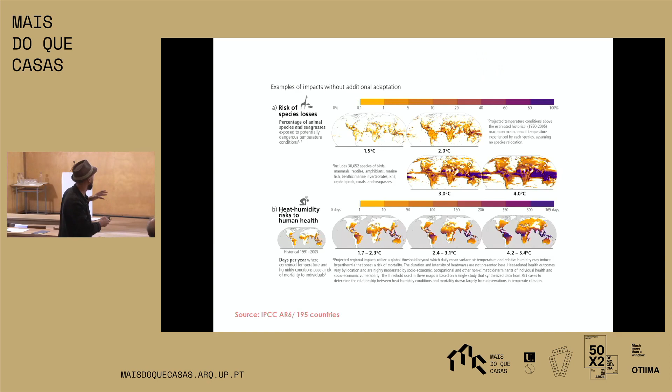It's full of data, like for instance, how it's going to heat the planet, or how the animals are going to die, and all this kind of information that is really useful when you have it out. For instance, they're explaining that this data is extremely important for 2030.

What we are going to do during the next 6-7 years is going to be extremely important to decide if we're going to reach the goals we are supposed to reach for the Paris Agreements. Do you know about the Paris Agreements, I guess? Can you raise your hand if you know about it? Everyone knows, right? So this is the Paris Agreements, and this is where we are right now.

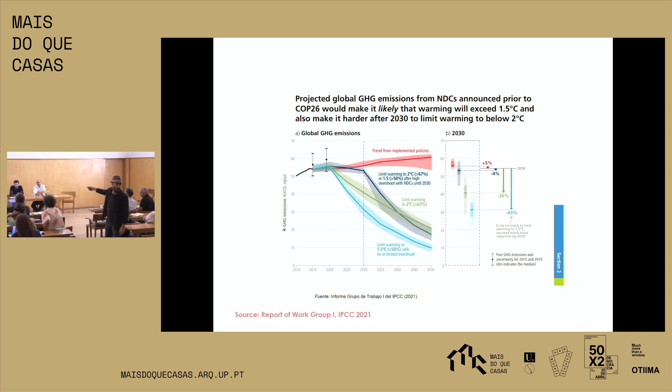So that's why probably now we are in the moment with the most change related to regulatory standards. There are a lot of new regulations. For instance, the European Commission is working on the new directive of the energy performance of buildings. This is going to affect all of us, right? So a lot of new regulations to achieve a goal: 0 emissions by 2050 and minus 40% of emissions by 2030, okay?

But the question is, do we know what 40% emissions means? Do we have a shape for it? Do we understand? I'm going to ask you a question and I need feedback: do you know, during the COVID lockdown, which was the percentage of reduction of carbon dioxide emissions when you were at home? Were you at home in Portugal? Yes? So can anyone help me? Which was the percentage of the reduction of carbon dioxide emissions in the world?

What? No, the percentage. So, which is the percentage of the carbon dioxide reduction emissions? Like 1%, 100%, 2%? Lockdown, 2%? That would be a hell, brother.

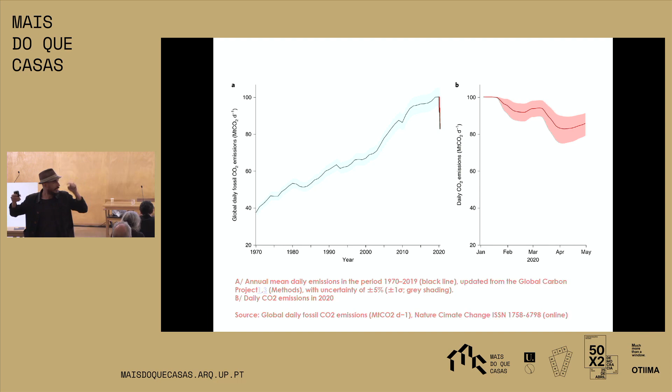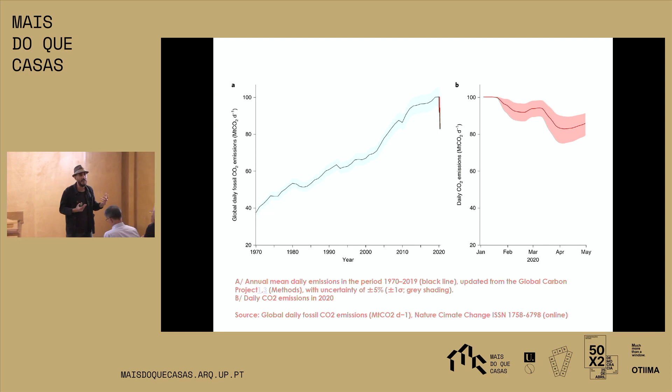Everyone moving around, 40%. So the question is, do you think we can do that without changing the model? Anyone in the room believe we can reach that goal without changing the model? Can you raise your hand, please? No one, right?

So that's why we think we need a new language. Since 1921, it's known that we see and think through language. What does it mean? It means that you cannot see what you don't have a word for. If you cannot express it, it can be in front of your eyes and you don't see it. For instance, we were told during our studies that in the States at the beginning, the Aborigines were not able to see a train because they didn't have the concept, they didn't have the word. So what they were watching was a dragon of fire, okay?

This is the same for everything else. You can pass every day in front of something, like a building or whatever, but if you don't know it, it's probable that you don't see it, right?

So, the proposal that we want to bring you all this afternoon is this: during the modern movement, it was the expression of fossil fuel materials, right? So the advantage of fossil fuel materials is that everything can be done. We have no limits. We've been told it's only about money, right?

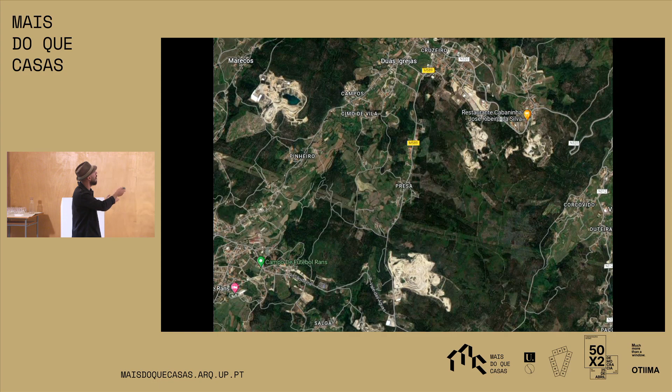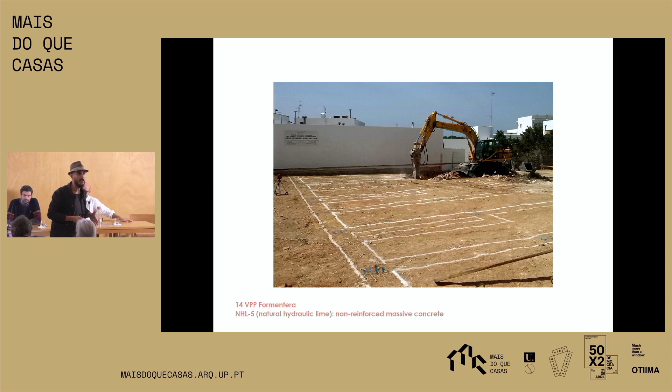Let's start with lime because it's very useful to explain the way of designing. Lime concrete is the concrete used by the Romans 2,500 years ago. In reality it's very fragile compared to modern Portland cement, not very hard. So you cannot design with columns or pillars, you have to design with load-bearing walls, so the weight of the building is spread along the foundation. The resistance of lime concrete is only 5 megapascals, 20% of regular concrete, and it requires 300 or even 700 days to get strong enough.

What's the interest of this concrete? It's not happening yet, but it can be cooked at 900 degrees. This is a difference, because modern materials are usually cooked at 1,500 degrees, and we cannot reach that temperature with clean energies. So 900 degrees is a temperature we know we'll be able to reach with clean energies, and that makes a difference, right?

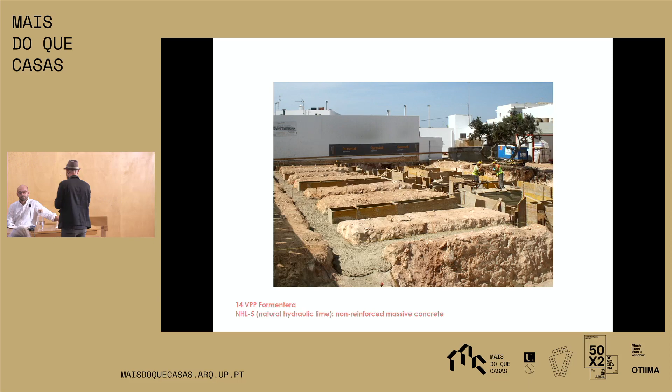So in order to make these materials viable, it's very useful to have the walls at 3 meters of distance, because this is the kind of weight these natural fragile materials are ready to load. Does it make sense? This is the first building we designed that way, and you can see all the doors are reused.

In this building, besides changing all the materials coming into it, we tried to know the name and surname of every person working to produce the materials, to know their labor conditions. We tried to include all the different ways to approach low carbon impact materials, natural materials or reused materials like the doors. Here we reused 100 doors.

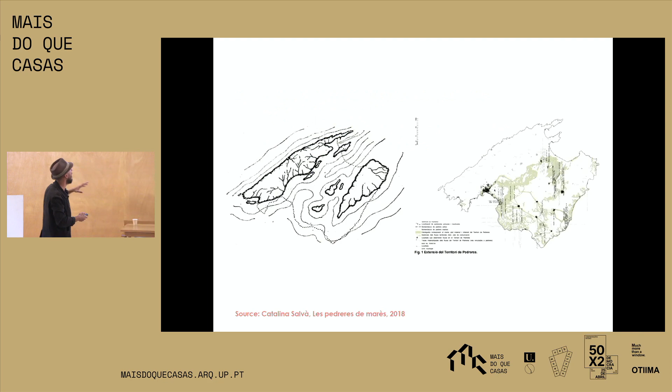So, second material in Mallorca: sandstone. The sandstone receives these kinds of questions: aren't you using too much stone? Won't it run out? What about the impact on the landscape if everyone uses sandstone? This is the question when you're doing only 1 or 2 projects in sandstone, which are like 0.1% of the buildings in Mallorca. Everyone thinks you're going to run out of sandstone, when in reality the sandstone is in areas that were underwater 200,000 years ago.

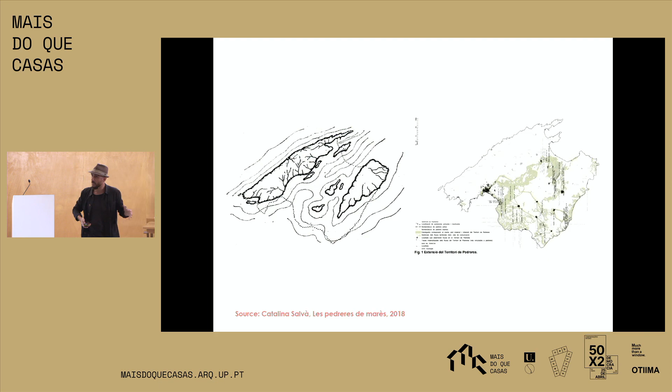So 20% of the surface of Mallorca is covered with sandstone, so that's not going to be the problem. The problem is that 12 years ago we had 20 quarries, and in 12 years, 12 quarries have closed because of the retirement of the old people working in the quarries. Young people don't want to work in the quarries, and that's a way to get the extinction of the material.

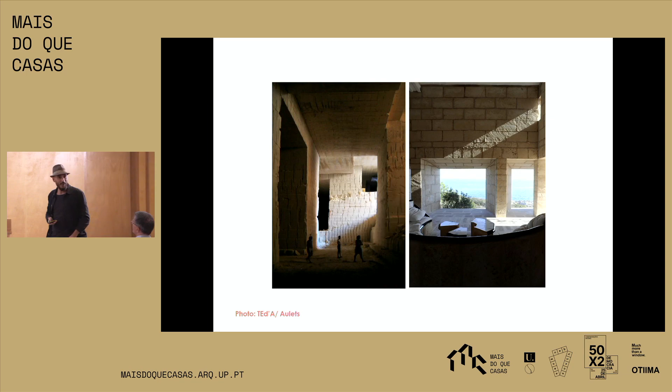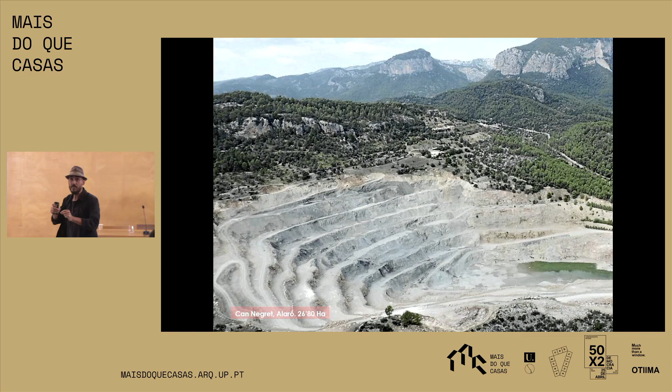But this kind of stone has been used for vernacular institutional buildings for hundreds of years. And the quarry itself is actually very nice, it even has some architectural qualities, let's say. You can even reach the same beam of light from Can Lis by Jørn Utzon, you can follow it in the quarry, right? There's something about this quarry that's not like gravel quarries. So maybe the quarry has an impact, yes, but not as high as a gravel quarry. So when we're talking about natural materials, maybe it's not 100% better, but it's a degree better than the previous ones, okay?

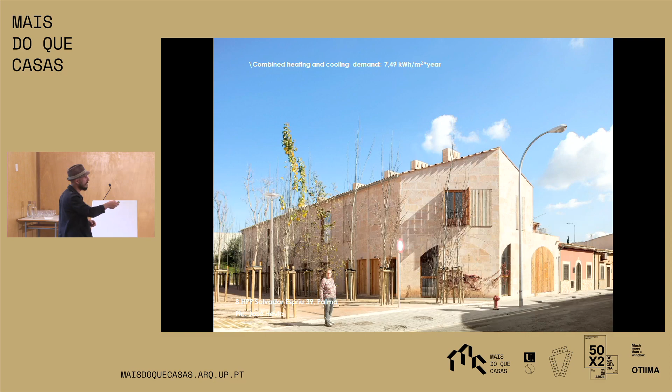So this is, for instance, the quarry Can Negret, where we got the stone to do this building that we designed in-house in Palma. It's a building of 2 stories, row houses, like the kind of typology that Peter Barber explained this morning.

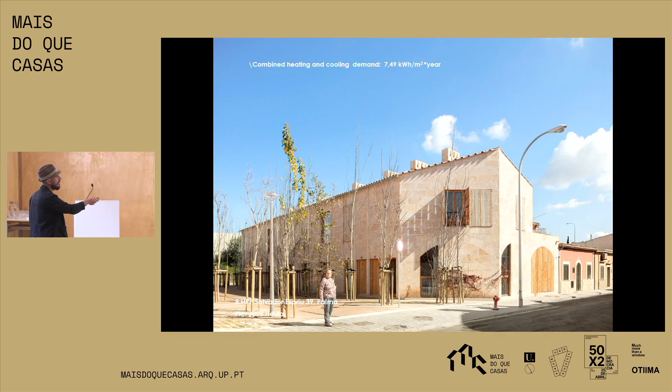You enter the house here or go upstairs to the first floor. On the ground floor there are stone vaults designed to provide mass, which is a lot of weight, to provide free cooling in summer. On the first floor we designed a pitch roof because it's cheaper in terms of structural calculation, since a pitch roof requires less wood than a flat roof. With the extra money we save from the pitch roof, we can pay for the vaults, because this is social housing and we have to fit very low budgets.

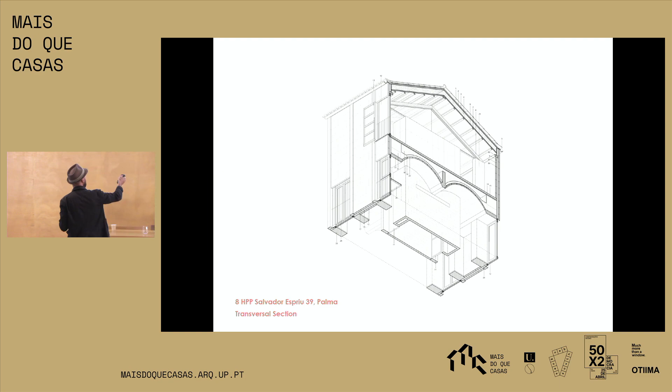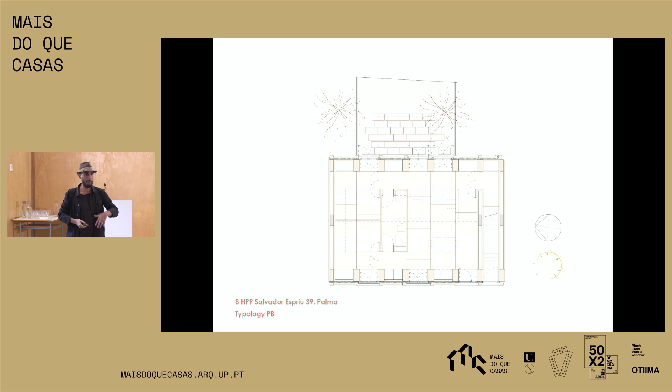Of course, the plan is related to the construction and these materials. It's impossible to think of a plan in regular terms and then try to use these kinds of materials. First you have to think how to bear the weight of the vaults and the horizontal forces from them. So you end up with huge columns in the facade, and these huge columns have to become part of the plan, becoming places to stay, storage, and things like that.

And this is the first floor under the pitch roof. That's a kitchen, another kitchen, and a patio.

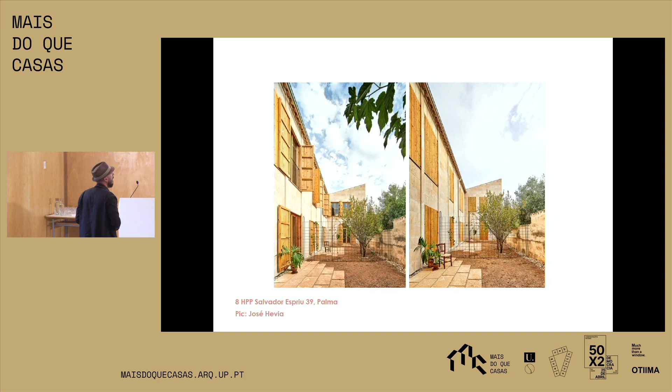We use Posidonia insulation from Mallorca beaches. This is a natural-based solution that is very interesting because it provides visibility about this plant that, when tourists come to the island, they think it's waste, but it's not. It's necessary to keep the waters of the island clear. So the reason, if any of you have ever gone to the Balearic Islands to swim, is because of this plant—otherwise we would have very dirty waters.

So this plant can be dried under the sun and used as insulation in the roof, and then you just cover it with regular tiles.

And this is how it looks—the building is not isolated. It's part of a plan with two different buildings and a public space in the middle, designed to avoid the heat island effect. So the pavements are draining, and the trees have been designed to provide shade to the building, participating in the bioclimatic design of every building.

So in the end, this structure is the result of having a very long depth. Since the typology is very long, nearly 14 meters, you need a lot of windows, and to have a lot of windows you have to open the facade very much. This is why you have all these columns, in order to have as many windows as possible. And this is the community space that has been created below these columns.

Question number 3: you make everything the same—aren't you tired of copying yourselves? From Palma.

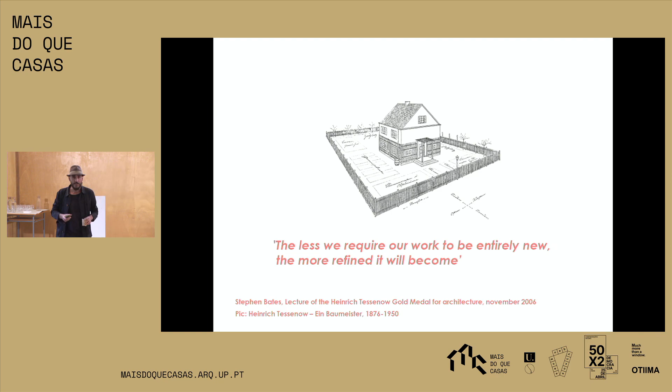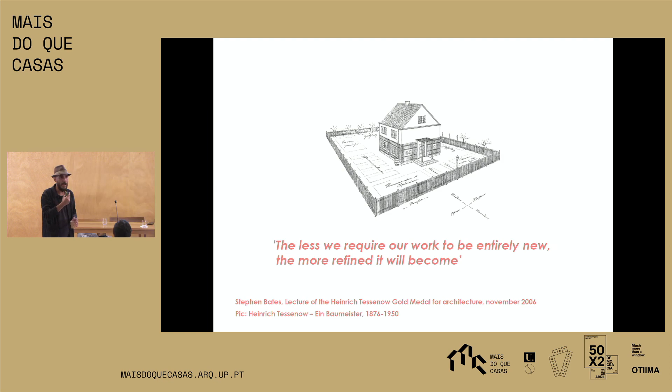I don't know about you, but we come from a context where it seems every project has to be different, new. The reality is we prefer to believe, like Deleuze, that deep repetition is characterized by deep difference. As Stephen Bates said, the less we require work to be entirely new, the more refined it becomes. That's why now we are in a process of trying to get better with every project—it's like you design a single project in your life, and you try to make it better every time.

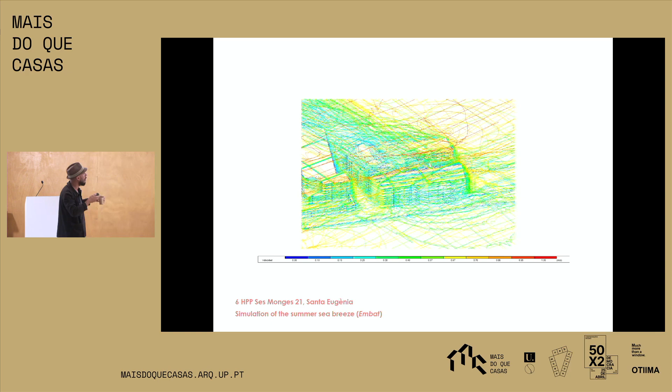This is why I'm going to explain this project in Santa Eugenia, which is like version 2.0 of the previous building in Palma. It's related to this very small town, and has a trombe wall facing south to provide hot air in winter, and a very clean structure where all the windows are the same, straight one up to the other. Of course we simulate the winds and breezes, because cross-ventilation is very important in our climate.

We try to reuse everything that existed on the site. There was a small workshop there, and we reused all the stone, the shades, and the tiles, as you can see—this is the stone from the previous building and the tiles. And this is the patio leading to the dwellings, with some private gardens for every tenant.

This is the evolution of the project. In the first project, since the depth of the site was very small, only 8 meters, we used a concrete beam. So yes, we're using concrete, and we use it when we need it. We use it as a very precious thing, trying to use as little concrete as possible because it has a lot of value. So we use it only when we really need it.

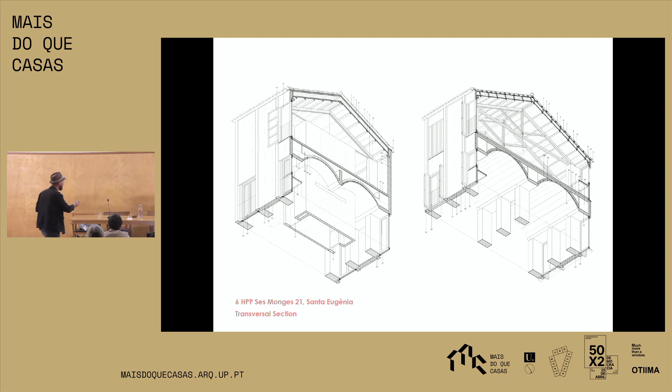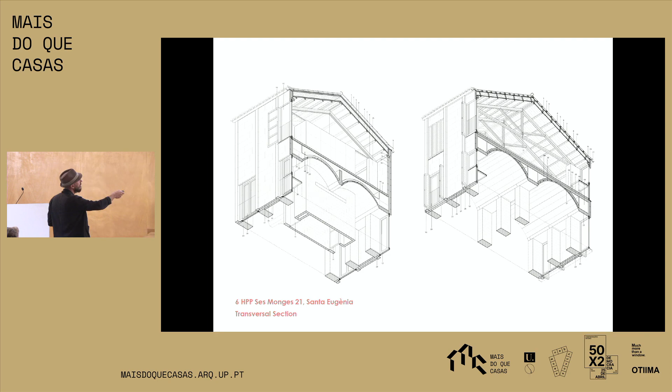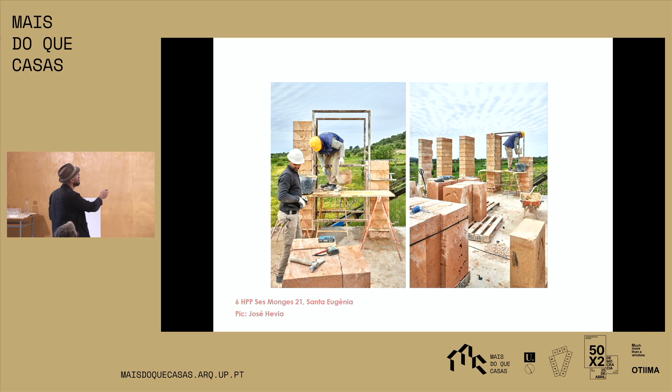In the other project, since the depth of the plot is 10 meters, we had space to introduce a third line of columns that provides a double vault space, more flexible in terms of use. This is the plan where all the columns are the same, which is very important because it's much easier for the builder to build fast.

That's the most interesting learning from this project: we were trying to build faster, cheaper, easier, and more refined. That's very important when building with natural materials, because natural materials are of course more expensive than conventional ones.

This is how we're building the vaults, and these are the kinds of spaces that come from it. This is what we believe is an architecture of degrowth. We don't have to be afraid of this word, because we believe we can provide a degrowth in the consumption of resources, but a growth in comfort.

Every dwelling has two places for the living room and kitchen, and then you have the bedrooms behind with panels that you can remove to change the plan through the years, and I think that's very important. We're providing a building designed to last hundreds of years, or as much as possible, but it has to be very flexible. So if you change the program, you can use it differently without doing so much work.

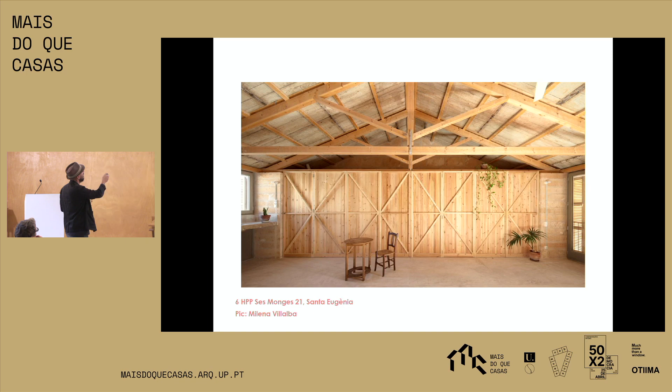What's very funny is that at the end you are building in the same way the Romans were building, with stones, lime mortar, and a stone lintel. That's the first floor, where all the wood is reused or recycled, except the wood trusses. These wood trusses, since they're structural, we use new ones, but everything else, like the ceiling, is reused wood.

And of course, it's insulated with Posidonia oceanica. We are trying to calculate the comfort for 2050 in order to provide comfort facing these kinds of new extreme heat waves that are coming.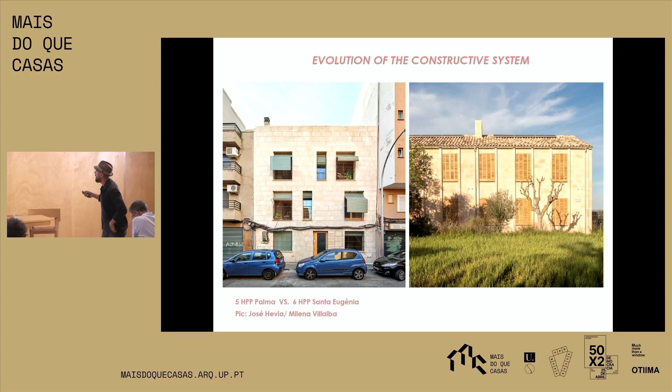What's interesting from the learning process is that we went from this very first building designed in stone to this last building, trying to make it as precise as possible. We learned that when building with this kind of material, it's much better being very ordered to fit the budget than, for instance, moving the windows. That may seem silly, but moving the windows costs a lot of work for the workers—it's much more complicated. You have to be there controlling every detail, and it really becomes much more expensive.

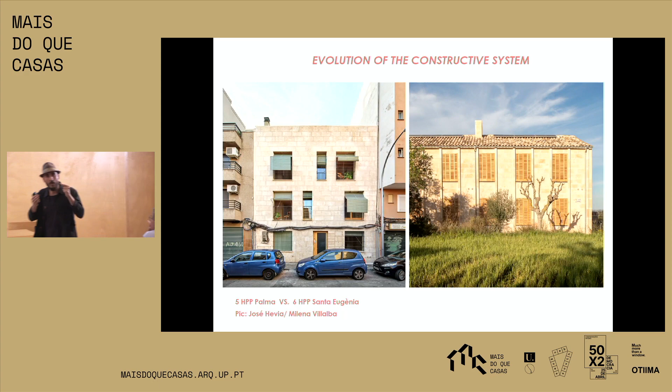What we also discovered is that when you're building like that, you require a lot of screws connecting the outside layer with the inside layer. And every time you cross the insulation, you may have a problem with endurance through time.

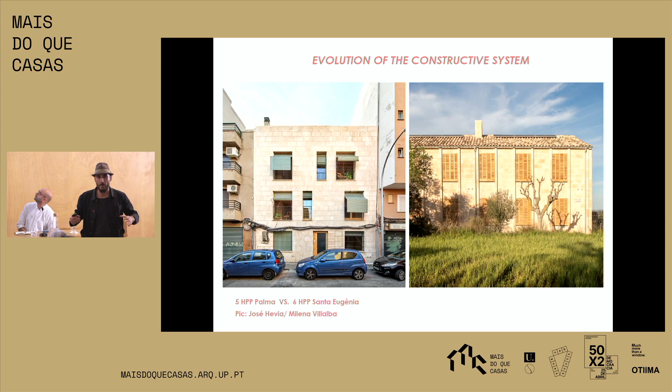That's why we developed this system of pilasters, so the external layer is more or less self-load bearing, and we are using connections only at the height of the lintel. It's much easier for us as architects to control.

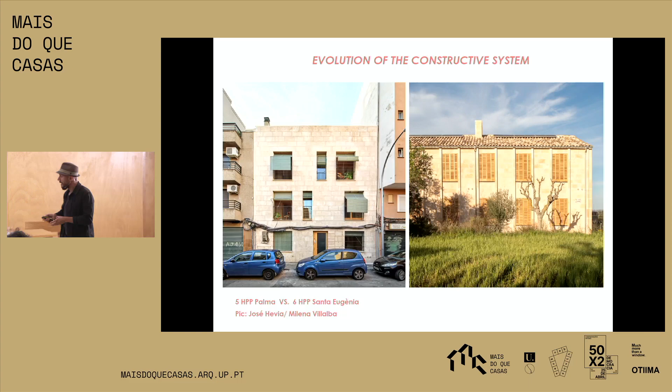So as an architect, you can go one day to the worksite and with a single visit control all the execution of every connection in the plan. Does that make sense? But instead, in this other building, it's impossible to control.

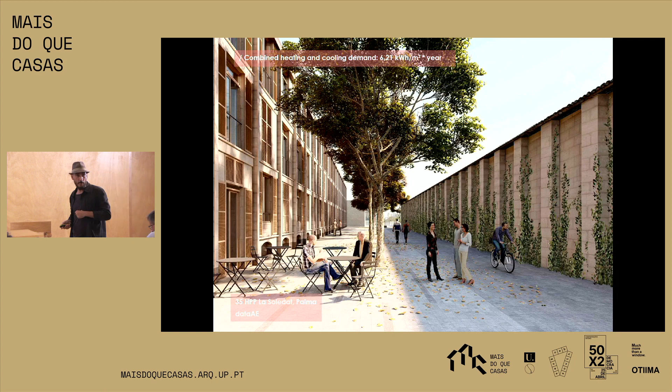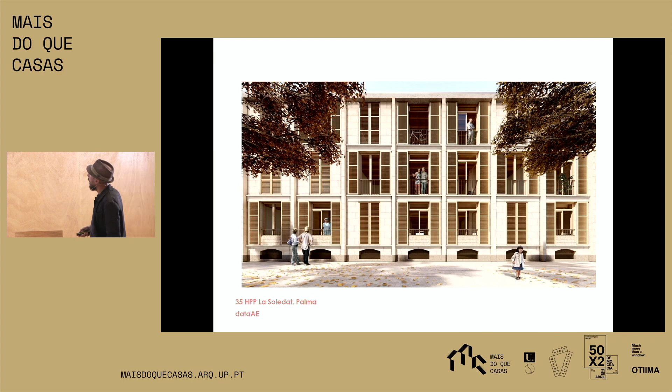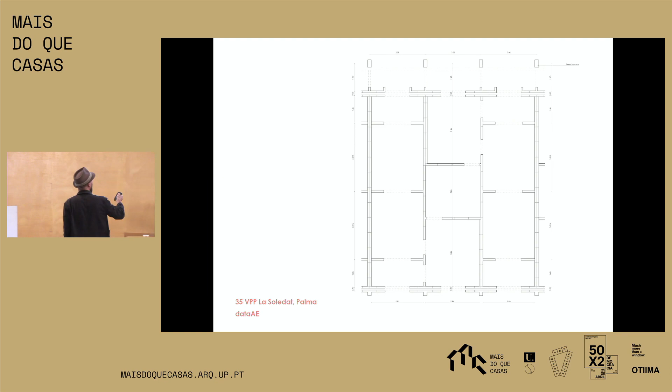This is also this very ordered building, 35 dwellings in Palma. As you can see, the program and the structure are the same. The way the walls are disposed allows them to provide a greenhouse effect at the beginning and at the end of the plan.

You can divide the different spaces, but that's also the way to provide structure to these very thin walls. In this project, they have been trying to reduce the volume of sandstone to the minimum possible.

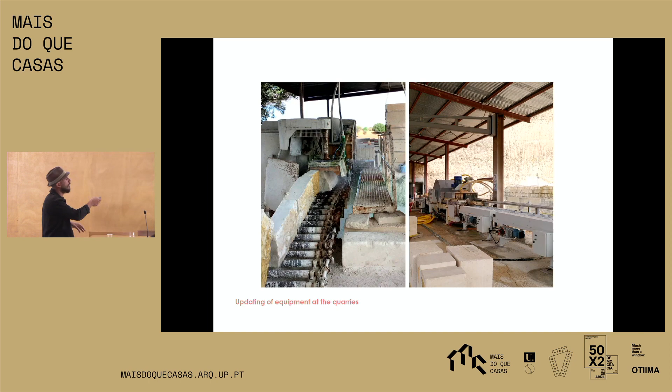Thanks to this effort to recover this very old material that was nearly extinct, what's happening is some of the quarries were working with machines and facilities from the 1950s. Now they are doing investments to get new machines, this quarry, that quarry, and others. So it's very important that we architects design with these materials in order to drive the change of the industry. I don't know if that makes sense for you.

Another material, ceramics. That's another building in Ibiza, designed by 08014, Adrian and Sandra. This is the project they presented in the competition they won.

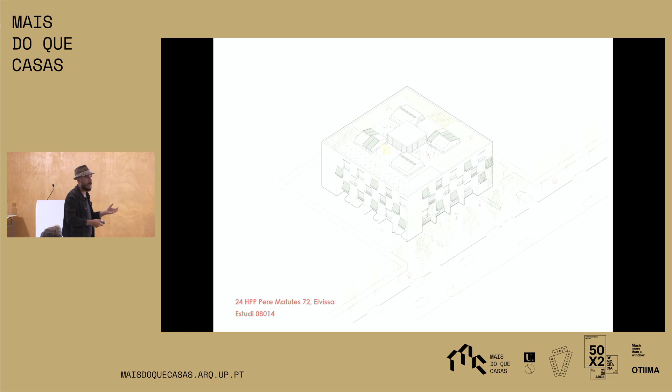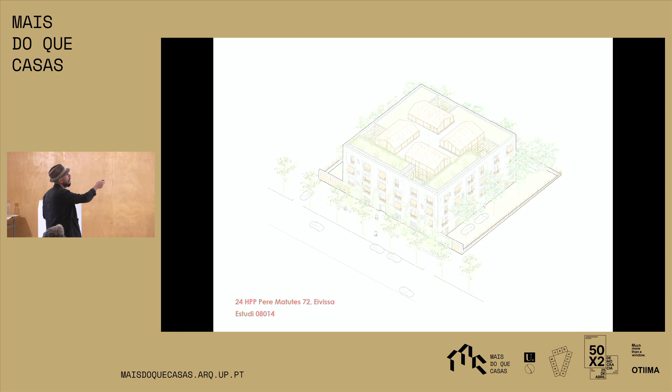They were saying they were designing with load-bearing walls, but the reality, which is very funny, is that the position of the windows was still in a way that was very complicated to build. That's why in the final project the windows ended up like that, and of course the greenhouses were much higher. So it's very nice to see how the buildings accommodate to comfort, which is the main priority, and to the materials you are using.

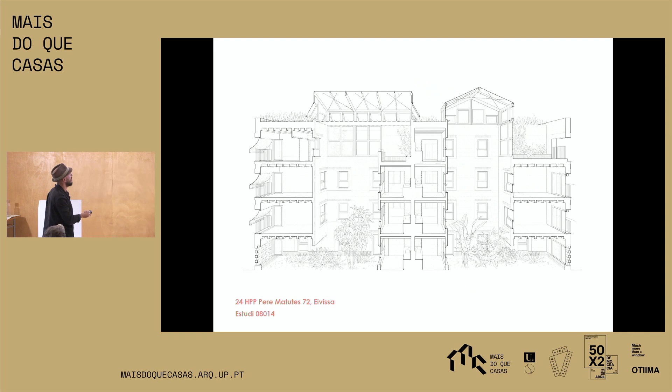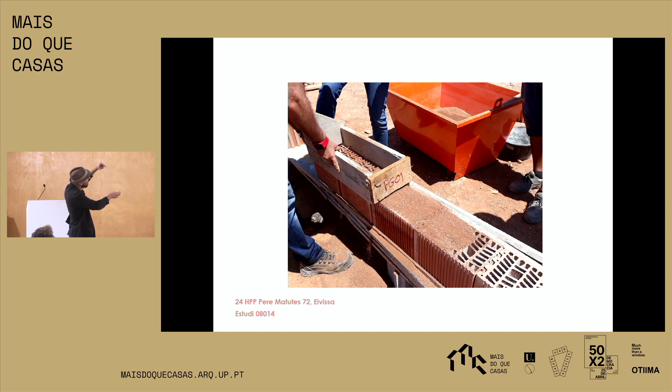So these are the patios. I'd like to remind you this is the cross ventilation from the facade to the patios. And they are filling the bricks with the soil from the excavation and depositing it again.

Another project, in this case mixing sandstone with bricks. At the beginning we were trying to be very pure and use only one material, but with time we learned to mix every resource we have at hand. So in this case you have the sandstone facades, and in this project by Lluís, Laura, Esteve, Ripoll Tizón, they have been inspired by something very important.

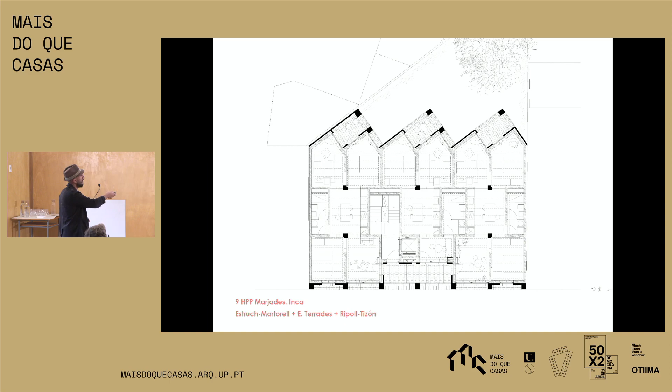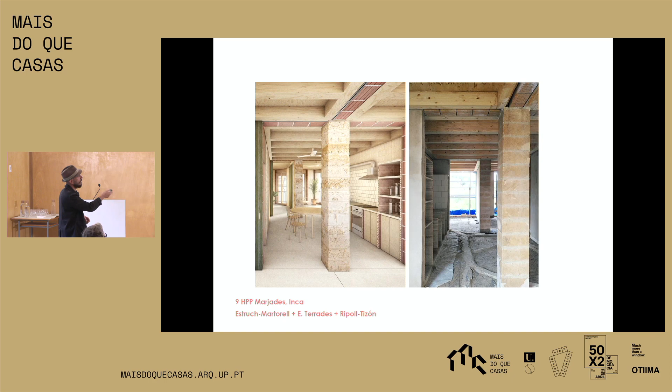Let's go for another question. What about the CE mark? How do you comply with regulations? This is a very regular question, it's everywhere in Europe.

It's not true that all materials have to have the CE label. There are some exceptions, and of course the use of these natural materials... just this one for me. Just this one, okay, so you're not listening to me. Oh, I'm sorry.

So there are exceptions to the CE label, and you can use it in order to recover these natural materials. And of course, in our case, we're complying with all the Spanish construction regulations, which in our case is the CTE. So in order to do these buildings, we're complying with every regulation there is.

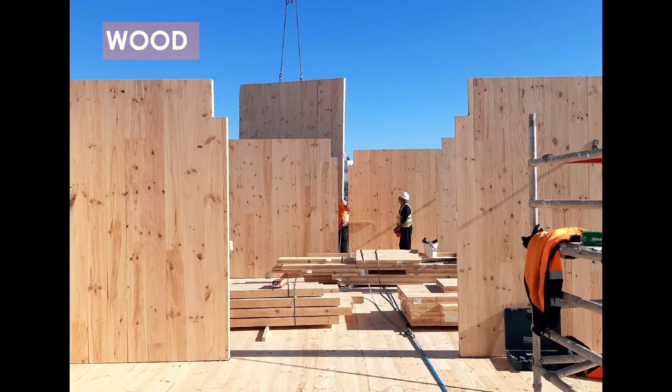So let's talk about recovering materials. We have wood, which was used previously in Mallorca, but now we don't have local production anymore. That's right, but we're trying to promote once again the production of local wood through our buildings.

This is the first building we have designed and built in wood, designed by Lloc Arquitectes, by Adrià i Itziar. They won this competition with a building that has the ground floor in bricks in order to avoid water problems for the wood structure above.

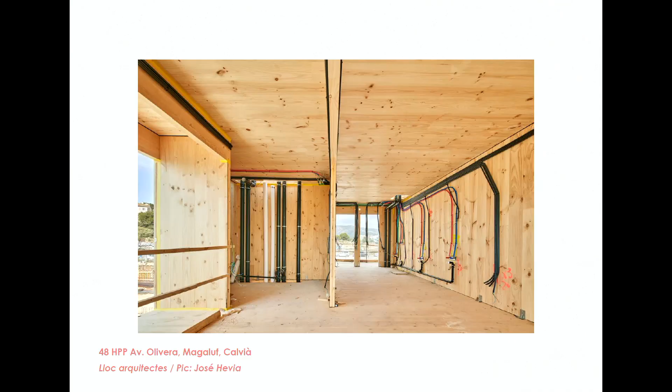The idea is to test the advantages and problems you may have as a social housing provider, building with wood in our climate in Mallorca, in the Balearic Islands.

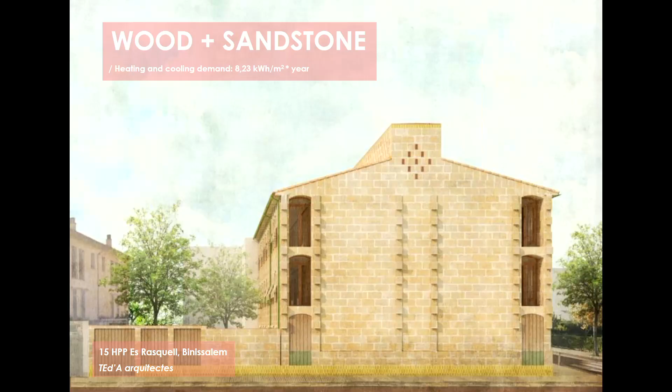Next example is about wood and sandstone. What I think is very interesting about this project by TEd'A Architects is that they built a hybrid structure with wood in the core and stone in the facade, providing the thermal mass you need in summer to cool for free, while using wood in the center to build as fast as possible.

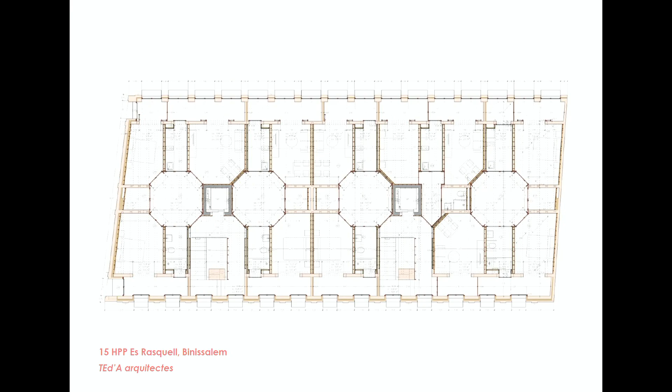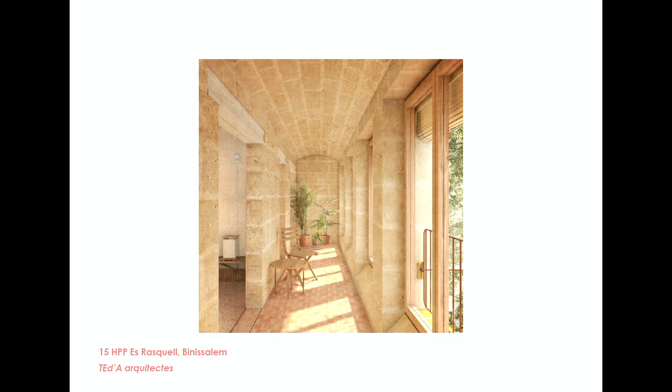What's very interesting is that by doing that, they achieve flexible interiors and an intermediate threshold space in the facade that also provides a relationship between the building and its context, which is important, because in Mallorca we don't have so much wood. Wood isn't really related to the heritage of the cities, you don't see much wood around. So by doing this kind of hybrid system, you can use the resources you have available.

For instance, if we are able to recover local wood production, we can also integrate the building into the context. In this case, this is the north facade with smaller windows and the south facade with much bigger windows to get some sun.

Another material is rammed earth blocks. This is a project in Ibiza designed by Peris Toral, and you can see again the smaller windows on the north facade and the bigger windows to get some sun on the south facade.

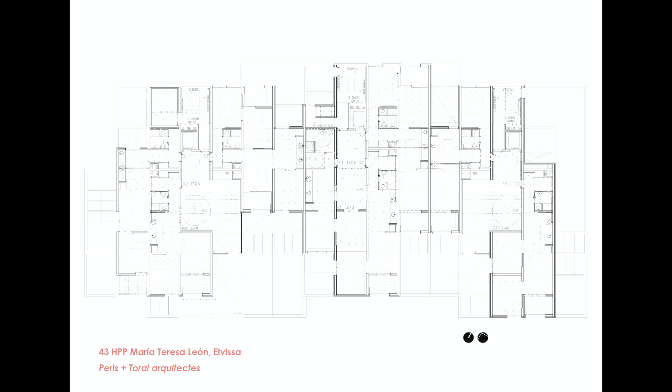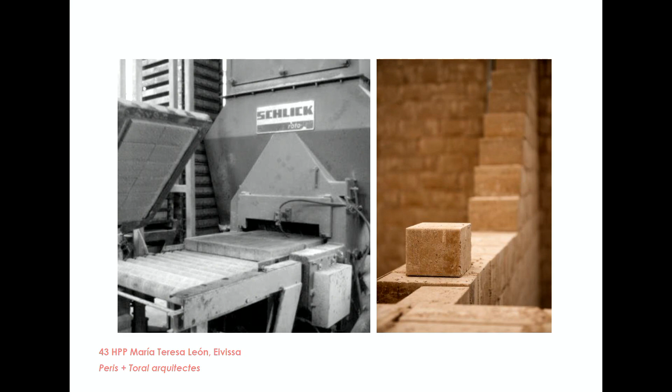And this is one dwelling. You can see it's very long with a greenhouse at the beginning and a collective greenhouse for the cross ventilation, and insulated with Posidonia once again.

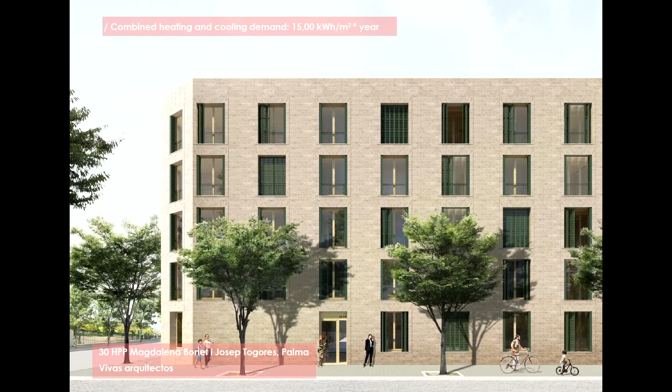Another building with load-bearing earth blocks, in this case designed by Vivas Arquitectos. This is the building under construction, and one interesting thing is that during the design process they developed a new piece of lintel so as not to use other kinds of materials. In order to solve the lintel with the same material, they developed these pieces that now everyone can get, and this is how it looks.

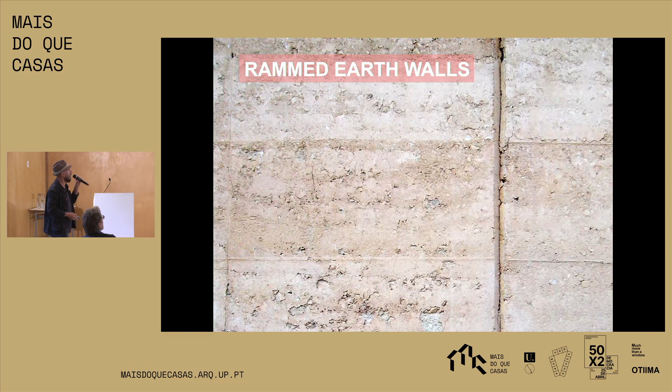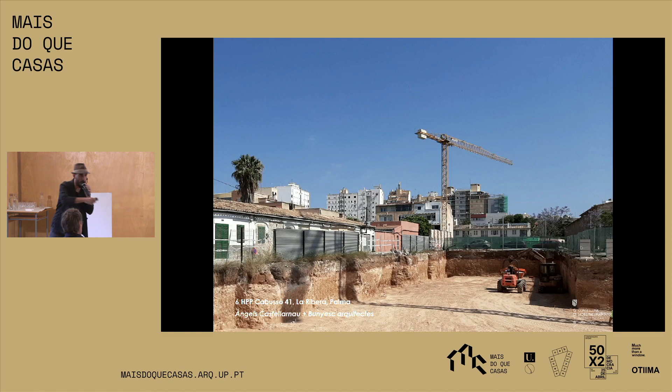We're also working with rammed earth walls. In this case, this project in Palma, designed by Angels and Josep, is using the earth from the excavation of another project by Vivas. So we are bringing the earth from one side to the other in order to build these walls.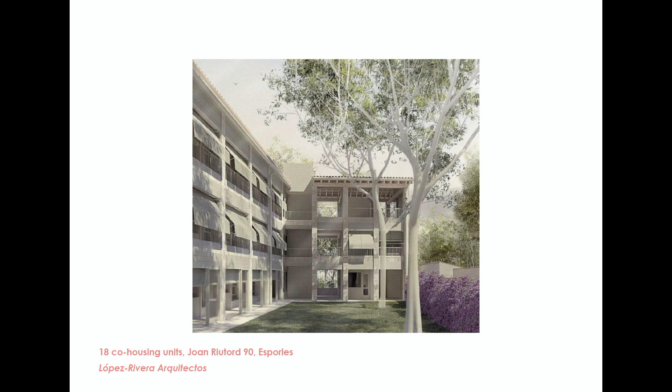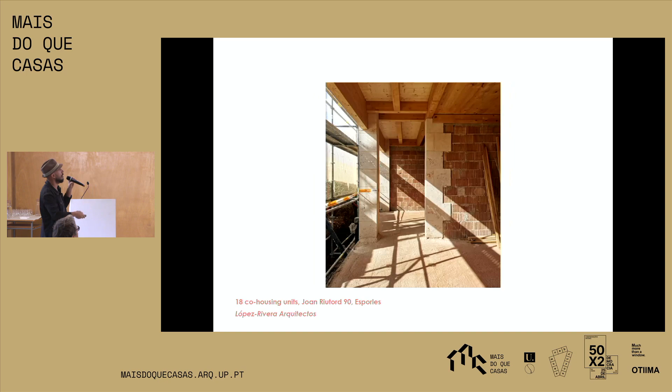It's also under construction, and these greenhouses are not only for the corridors but also to provide heat to the dwellings. So these threshold spaces are also the bioclimatic device in order to provide the free heating system, and some collective spaces.

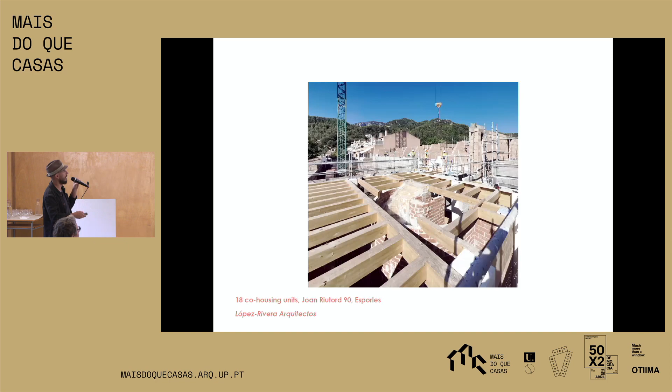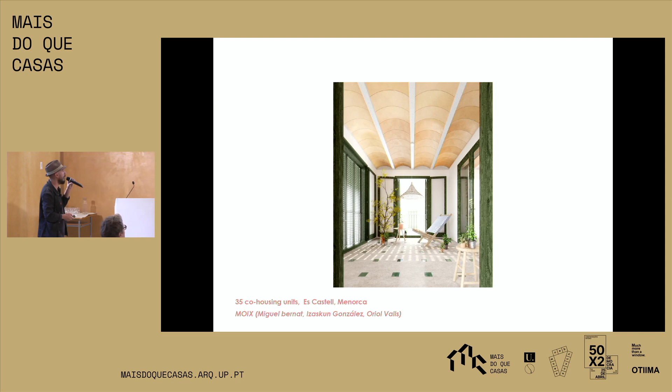This is another co-housing project in Menorca, in this case related to the landscape of the island, designed by MOIX Architects, by Izaskun and Oriol, that is in a sandstone quarry. Actually the plot is an old quarry, so there is also this relationship with the level of the quarry and the use of white stone, and this is the kind of collective patio between the dwellings, and this is the private terrace that every dwelling has.

Okay, so we arrived to question number 5. But this cannot be applied on a large scale, how would you deal with the city's processes? That's from Madrid, of course, from the capital.

The reality is that we have seen very big scales. I don't know for you, but for us on an island, buildings of about 35, 40, or 60 dwellings, this is a scale that deals with the size of the city. It's true that there will be cities that won't have access to this kind of natural materials, I do agree, and I think it's very important, the urban mining you've been talking about all day long, which is understanding the city as the quarries of the 21st century.

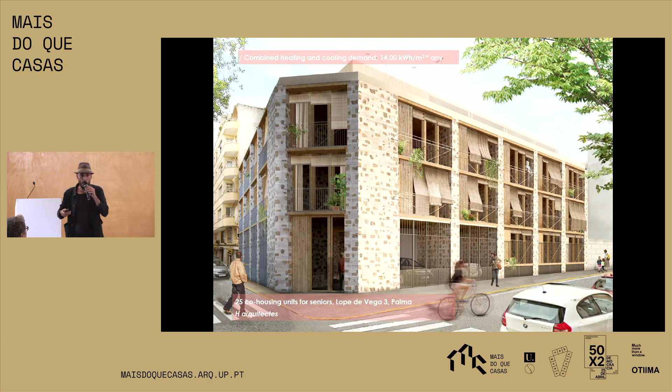So this is a project by H arquitectes in a plot where there was an existing building whose structure was in very bad condition, and the building was also out of the urban plan regulations. So it had to be demolished in order to build a new building, and that's why these architects, H arquitectes, reused all the material from the existing building.

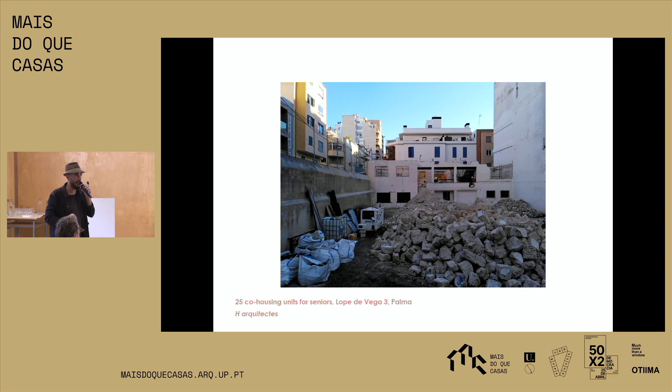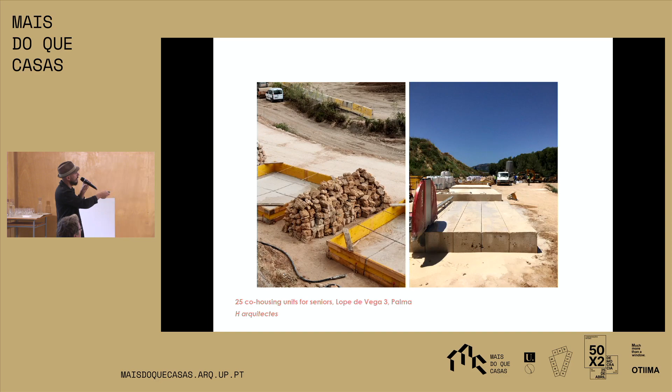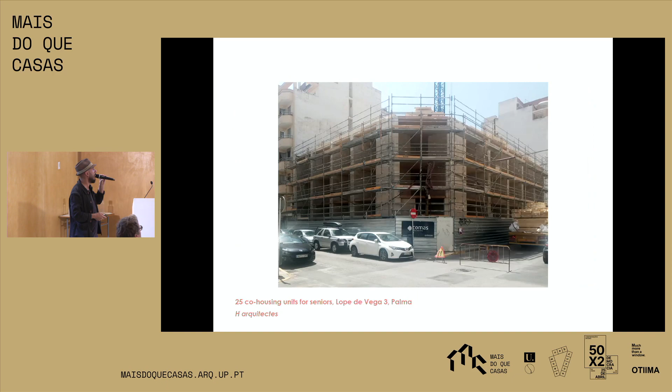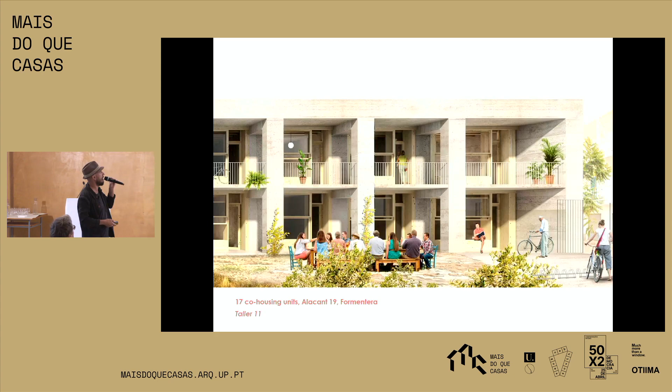Another project of urban mining, in this case from excavation. This project is going to use all the stone from the excavation, a project by these very young people, Taller 11. They won this competition with these massive walls, also with lime concrete, using recycled aggregates from the excavation that provide this mass.

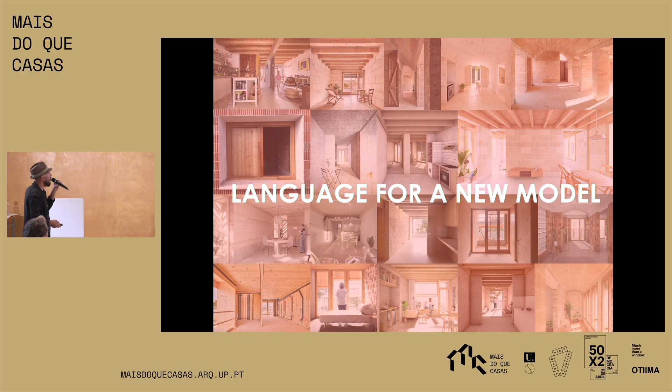So all these projects that you can see - this is just a very short selection because I only have a short time - is what we think provides this language for a new model.

And aren't you overusing this kind of raw style? What about a nice plaster? Okay, first answer: gypsum plaster has a problem, which is that it makes it very difficult to recycle the material behind.

That's the first point why we prefer to use lime plasters, earth plasters, or any other kind of compatible plaster with the reuse of the future aggregates, if one day you have to demolish the building.

These kinds of renderings are usually more expensive, so we use them when the materials behind are cheaper - for instance, when there are bricks. But when we have stone, it's too expensive to pay for the stone and also the rendering.

But it's also more important - which is, we want to make it visible. This is a complete change of model. It's very hard to recover the design and construction in stone, so we believe it's very important to show that this building is made of stone and not something else.

Since the master painted his own bedroom 40 years ago in Can Lis - this is the Jørn Utzon house again - we can paint it. But we will paint it when everyone understands that designing and constructing a house in stone is something as regular as any other material.